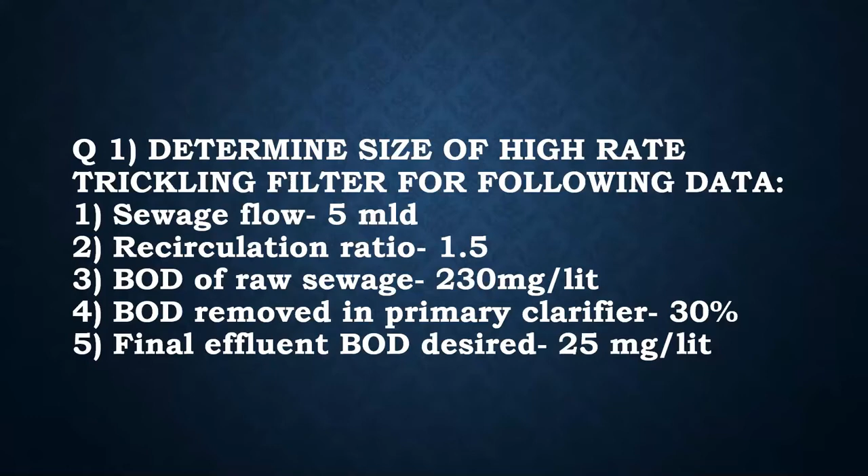So we have Q is equal to 5 MLD, which is already given. Now, as we have already discussed in our last video, the first step is to calculate your total BOD loading. BOD5 we will call it, which is given as Q into your given BOD5 value. Okay, so what will be the value over here?

Total BOD loading is equal to Q, 5 MLD, converted into liters per day, so into 10 raised to 6 liters per day, into BOD which is given as 230 mg per liter, and now we want it in kg per day, because in our formula of efficiency we want it in kg per day. So we will convert this 230 mg per liter into kg per day, which becomes into 10 raised to minus 6. So this value will come as 1150 kg per day. This is our first step, that is total BOD loading.

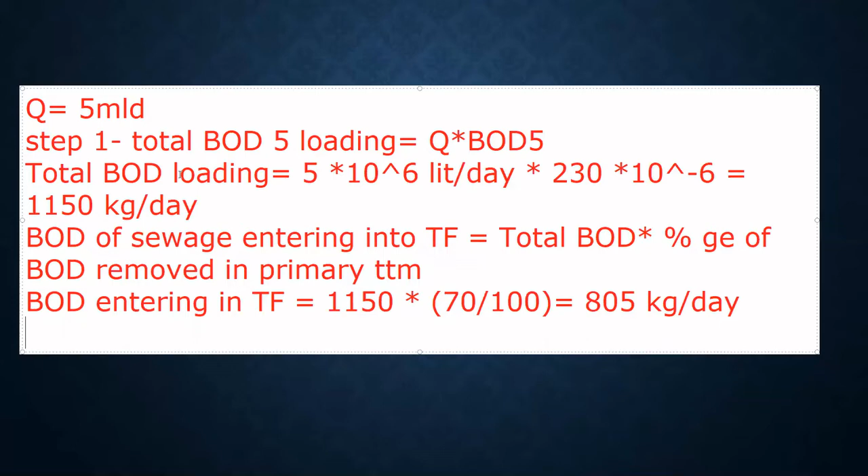So what will be the next step? We are going to calculate how much BOD will be desired for our effluent. So the next step will be desired BOD of effluent, which will be equal to desired given BOD of effluent into Q.

So desired BOD is equal to 5 into 10 raised to 6, which gives liters per day, into the given desired value of 25 mg per liter. We have to convert that into kgs, so that will become into 10 raised to minus 6. So the whole value comes out as 125 kg per day.

Next step is removal efficiency of trickling filter. Okay, so this will be 805 minus 125 divided by 805 into 100 for percentages.

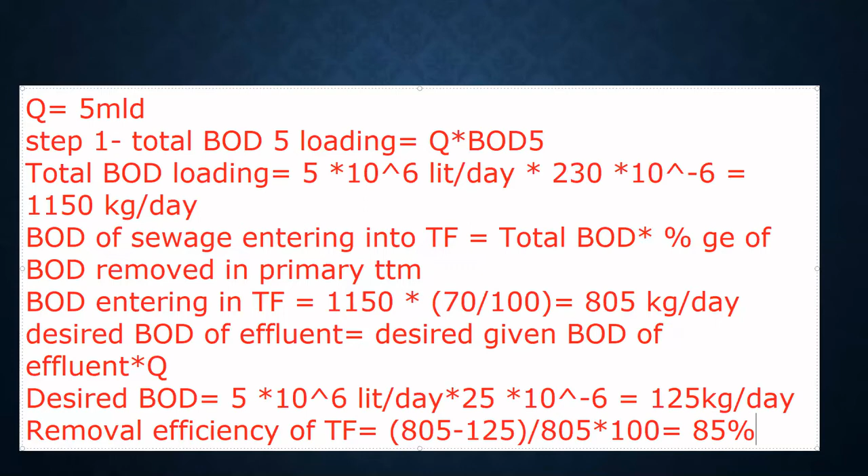So for this design flow and whatever BOD load is there, your trickling filter is going to give you 85% removal efficiency. Now we need to calculate your volume and the rest of the dimensions of your trickling filter. So we are going to use the efficiency formula.

Before that, you need to assume something. Now, E is equal to 100 divided by 1 plus... I have already told you the main formula for efficiency in my previous video. If you don't know, just go through that particular video. Into, here under root is there. This is the basic formula for your efficiency.

Now we have W, that is your BOD. Volume we need to identify. We have calculated the efficiency already, which is 85%. Recirculation ratio is already given in your data, 1.5. If the recirculation factor is not given, you need to use the formula 1 plus r divided by 1 plus 0.1 r square. But here it is given, so we are going to use F is equal to 1.5.

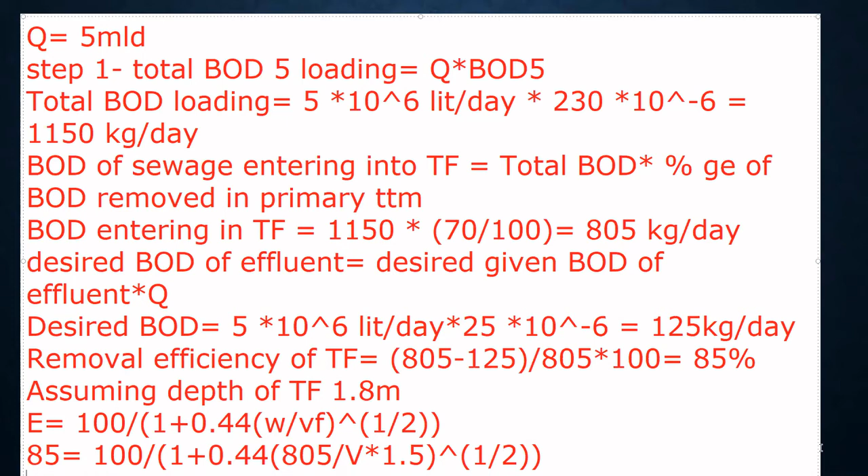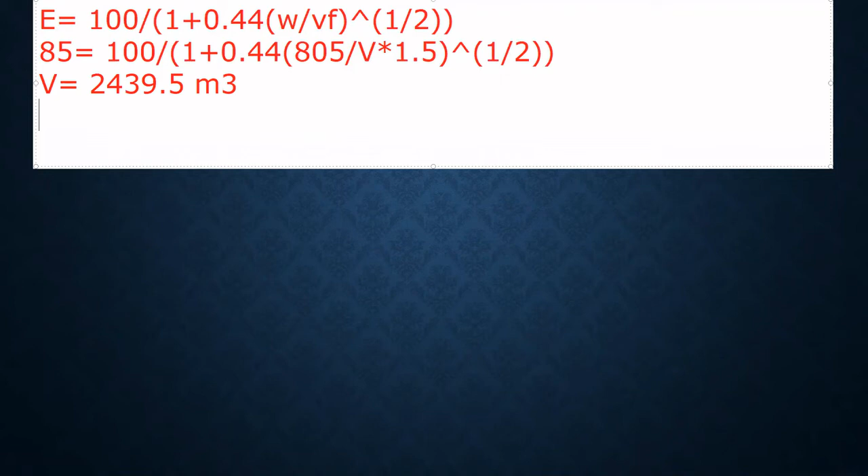So after doing the whole calculation, you are going to have V is equal to 2439 meter cube. Please do check the numbers with a calculator. Now, assuming depth of trickling filter 1.8 meters, typical value.

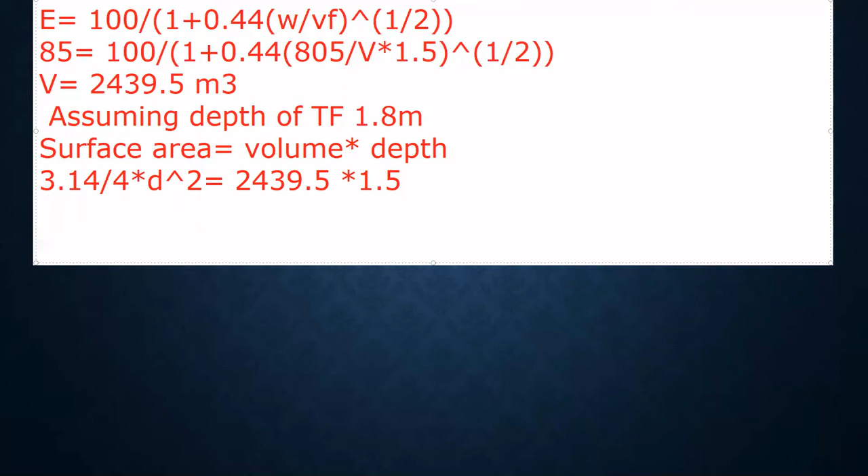Now, as we know, surface area is equal to volume into depth. We know the volume, we don't know the surface area. Surface area is equal to pi by 4 d square. Pi by 4 into d square is equal to, our volume is 2439.5, into 1.5. By doing this calculation, your D comes out to be 41.5 meters. So this is your final answer.

Here we have ended the design of your trickling filter. This will be half of the design. If you go further, there will be oxygen calculation and so on, but this is quite okay for your academics. So up to this you can calculate for a given problem.

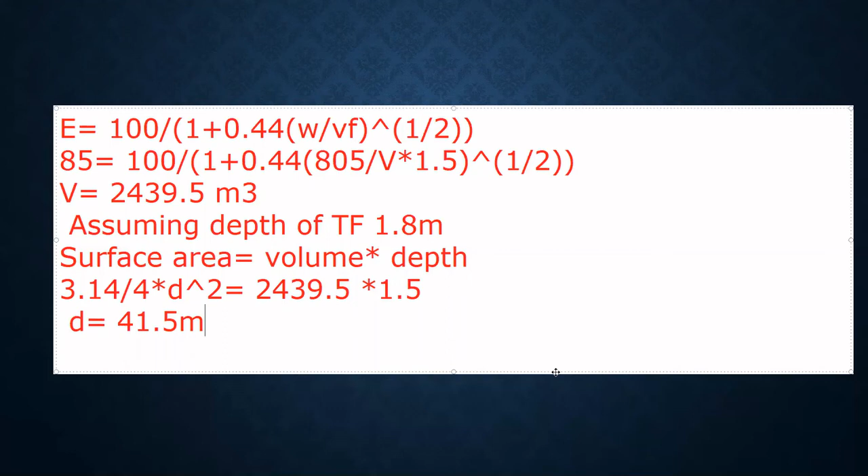So this is the main problem or the common problem which will be asked on your trickling filter. I hope you have understood this particular problem.

Now what to do related to this particular problem? Up to the calculation of desired BOD you can do the same.